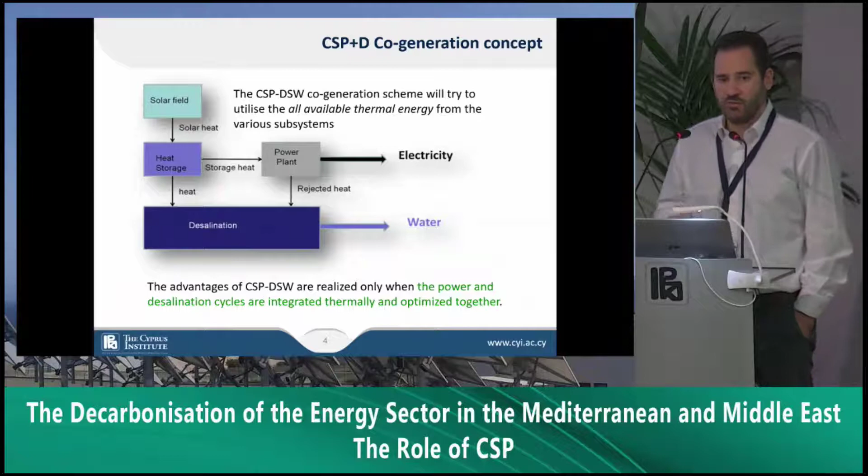In fact, it's something that we propose at the Cyprus Institute through the cogeneration of electricity and desalinated seawater by taking all the heat available from a CSP system, storing it, and then in parallel producing both power and desalinated water. And it's the optimal coupling of these two cycles that gives the advantage for the CSP plus desalination solution. The thermal desalination process that we are talking about is multiple effect distillation.

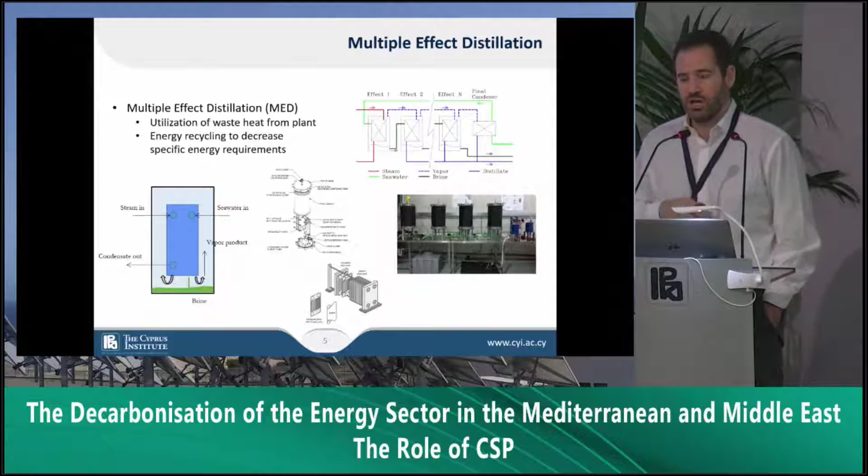For those of you who are not aware of the process, you have a heat exchanger into which steam and seawater are introduced. As the steam condenses, heat is transferred to the seawater, causing it to evaporate, and then we use these vapors as the driving force in the next effect and subsequent effects to desalinate another quantity of seawater. And I have some schematics and pictures of our experimental setup. One of the novelties that we have is the plate heat exchanger, which we'll discuss a little bit later. In fact, we've done several studies to analyze the behavior of the system.

The one that I want to focus on is how the specific energy requirements decrease as we increase the number of effects of the system, which is in fact the strength, or the advantage, of this multiple effect distillation technology. We've also come up with some models to predict the behavior of these systems that match fairly well with the literature, and we've also focused on the dynamic and transient simulation behavior of the system itself.

The reason for doing this is that we're interested in coupling the process, as I said, with the solar-driven process, and when we have a process that is not steady state, we have to better understand the transient behavior and see what the time response would be when we drive our desalination process with this time-varying resource. So it's a tool for the plant operator to understand when to divert energy towards desalination or towards electricity production, and understand the product he will get based on the transient nature of the resource.

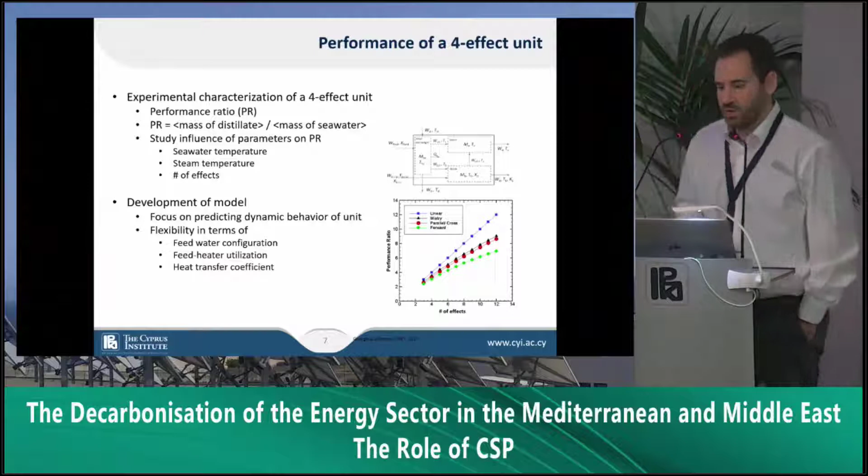Of course, we can look at the energy flow in a typical solar plant. We have the energy coming in, reaching the light concentration and collection plant, with some losses there due to cosine effect and other efficiencies. And as we go through the conversion process to electricity, we have various losses throughout the system. In fact, we've done a similar study for our particular setup in the Proteas facility, and identified several locations where we can have high-grade heat or low-grade heat to drive the process. In this particular study, we identify the conventional location to draw power, which is after the turbine. But as we've already discussed, this comes with a penalty to the turbine and to the electricity production.

However, it's been briefly touched upon in the discussion that we can design the two cycles together and design the field together. So in our particular case, we have also some losses that we can capture from the receiver, and thus converting them from losses to a useful energy that can be produced in the system itself.

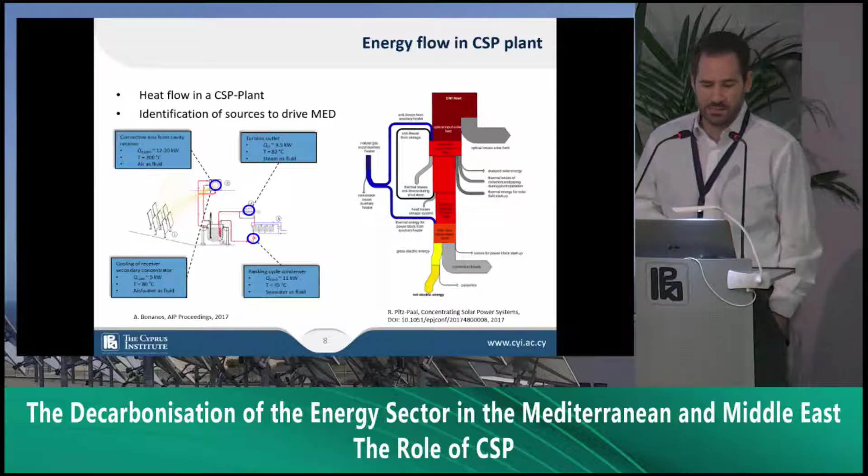Other studies have also focused on comparing, and Diego showed almost the exact same schematics. This is one of his studies. So we can compare a CSP plant that would use the electricity produced in an RO to generate desalination, or a truly coupled CSP and MED plant, how they would behave.

So what this study shows is a way to integrate the low temperature desalination process, and what is given in the table is the specific electricity consumption of the RO. It's parametrically done as the specific electricity consumption of RO increases, and as the specific electricity consumption of the MED increases. And the bold numbers indicate the advantage for the MED system. So this is an encouraging result, and it shows that under certain conditions, the coupled CSP plus desalination is favorable.

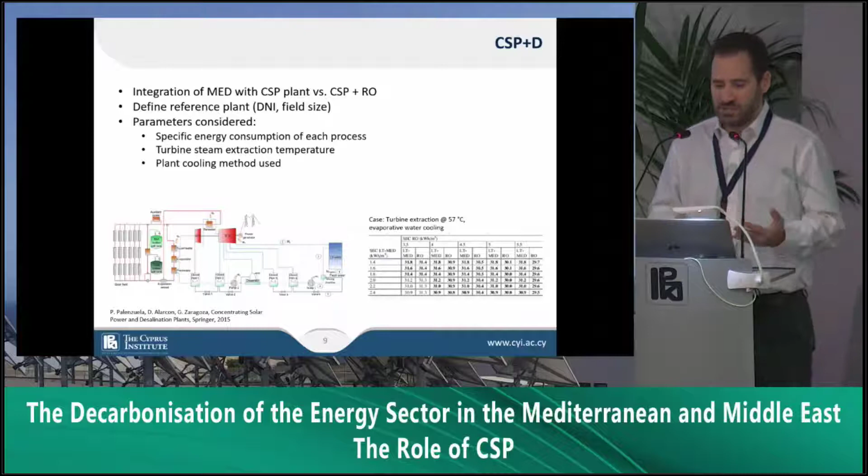But then it's also instructive to look at what the market is doing. Currently, we have about 100 million cubic meters of water per day produced. And you can see that it's nearly an exponential growth over the past 40, 50 years. But the current market is dominated by reverse osmosis. And if we also look at projections of where this technology is going in the future, in fact, the RO, which is the light blue lines, also dominate the future expansion.

And the reason for this is simple. Over the last 40 years, the specific energy consumption of RO has significantly decreased. The red line is the thermodynamic limit that I showed you in the beginning. So the specific energy consumption of RO has dropped by almost an order of magnitude over the last few years. So this poses the question that Diego already addressed. Is thermal desalination dead? What is the future for thermal desalination? So we don't think so. We think that there's several specific technological applications, locations where we can have an advantage.

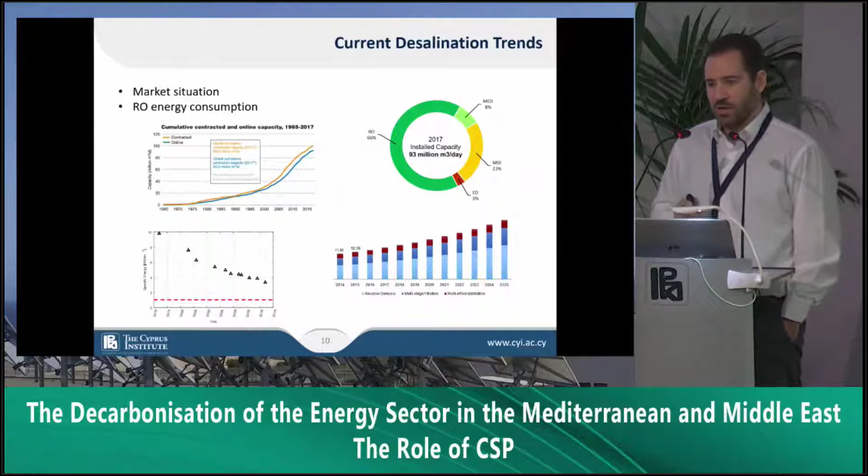One of them is the plate heat exchangers. So this is a specific type of heat exchanger as opposed to the shell and tube heat exchanger that's traditionally used in these applications. The nice advantage about these heat exchangers is that they are compact. They have higher heat transfer coefficients.

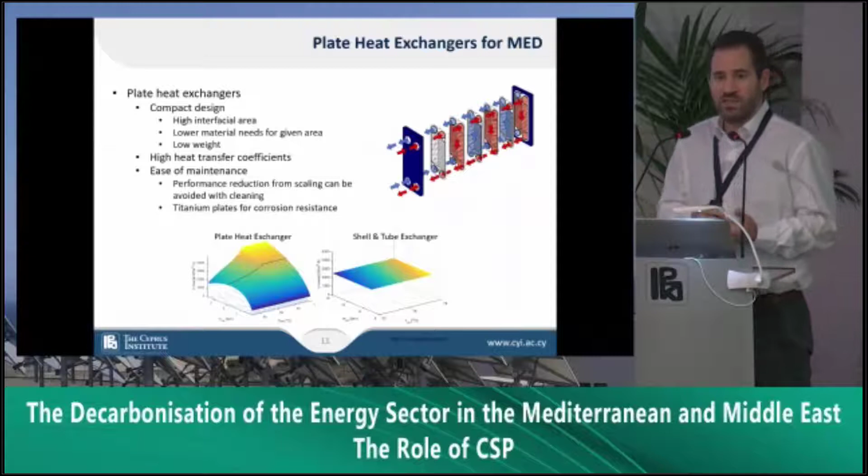In fact, what's plotted here is the variation of the heat transfer coefficient as a function of flow rate and temperature. On the left is for a plate heat exchanger, and on the right for a shell and tube heat exchanger. So of course there's a large variation for the plate heat exchanger, but if we have a correctly designed heat exchanger, we can achieve maybe 2 to 3 times larger heat transfer coefficients, which means half to a third the size of the heat exchanger, and also the equivalent cost reduction in capital.

We can also think about using other inexpensive materials. The previous heat exchangers that we use here have titanium as the heat transfer surface because of its corrosion resistant properties to salt. However, we can think about novel polymer materials to do this desalination. And I show you some examples from the literature about what people are coming up with. We can also consider novel manufacturing techniques like 3D printing to optimize both the heat transfer area and the pressure drop that we have in these exchangers to ultimately decrease the cost of this technology for the future.

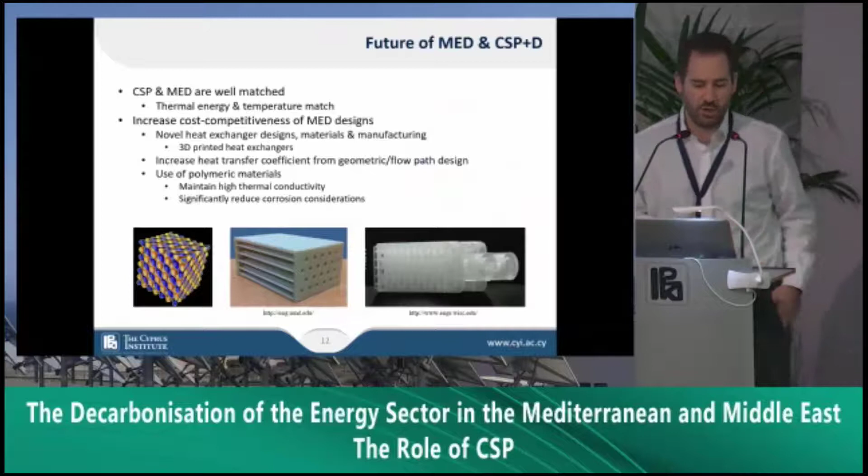Finally, we need to focus on the cogeneration, the coupling of CSP and desalination, and use all the available energy that we have to drive the thermal desalination process. In fact, we can not only use the low-grade heat after the turbine, but we can also harness other losses at higher temperature to be able to drive, let's say, a coupled thermal vapor compression and multiple effect distillation system, which leads to higher yields, so more water production from the system and equivalently less cost.

Also, we need to focus the use of these systems in areas where they have the advantage over reverse osmosis. For example, focusing on higher brine concentrations and more water recovery to reduce the pumping cost that we have. And this is again something that can be achieved through the use of the new materials, the polymer materials, that will also reduce the fouling effects and the limitations that we have with the current technologies.

Finally, zero liquid discharge is a very promising aspect, although it is very energy intensive as a process. We can think about, again, using the heat that we have from the solar system to aid this.